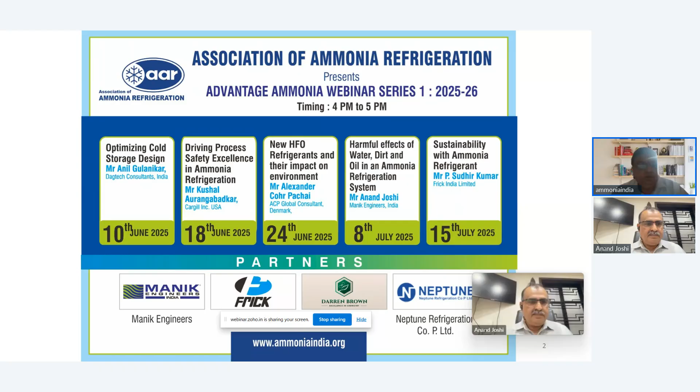A little introduction about Mr. Anand. Many of you know him already. Mr. Anand is director at Manik Engineers India. He's an engineer from Bharati Vidyapeeth College of Engineering in Industrial Electronics and Instrumentation. He's synonymous with Manik, a well-known brand for refrigeration controls, and he's a pioneer in many cost-effective refrigeration plant control solutions. He has vast experience of 35 years, having generated different products and solutions for energy optimization and conservation. He is also past president of Association of Ammonia Refrigeration, past president ASHRAE Pune chapter. He is also a member of ASHRAE, Indo-German Chamber of Commerce, Indian Institute of Electronic and Telecommunication Engineers, Indian Dairy Association, and RETA.

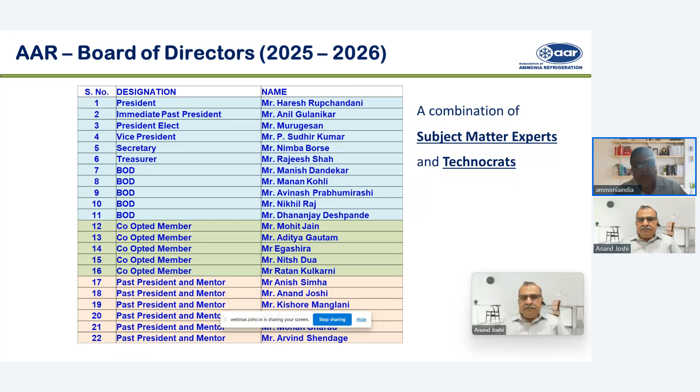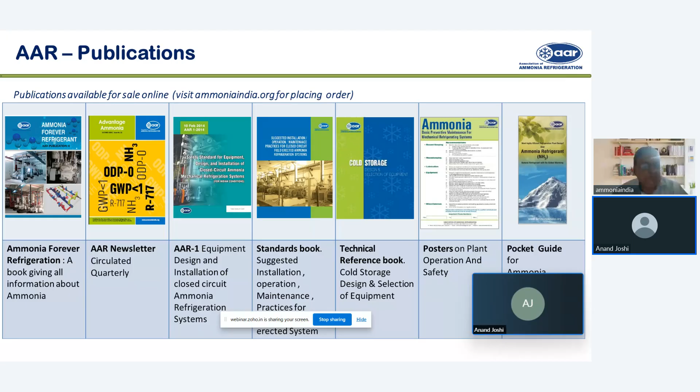These are the publications we have. Apart from the newsletter, which we publish every quarter, we publish some books and guides for the benefit of the industry. This is a standard on which we had put a lot of work, and we came out with a safety standard for equipment design installation of closed circuit ammonia mechanical refrigeration system. Based on this, BIS has adopted it, and an IS standard is now available.

Advantage Ammonia programs are in-person programs we have been doing, and they have been very popular over the last 10-12 years. This year we have so far successfully conducted 2 programs, one in Pune and the other one at Sangli. We have planned to conduct more such programs at Coimbatore, Nashik, Mangalore, and Deesa in the coming days.

Then webinars, which are free, just to spread knowledge of ammonia refrigeration. We started in June this year, and it has been continuing. After series 1, we will plan for series 2, and the webinars will be an ongoing thing.

Apart from webinars, we are also thinking of providing online training to interested companies or individuals. So if any one of you want to have some kind of training which can be conducted online, you can approach AAR - we'll be glad to assist you on that.

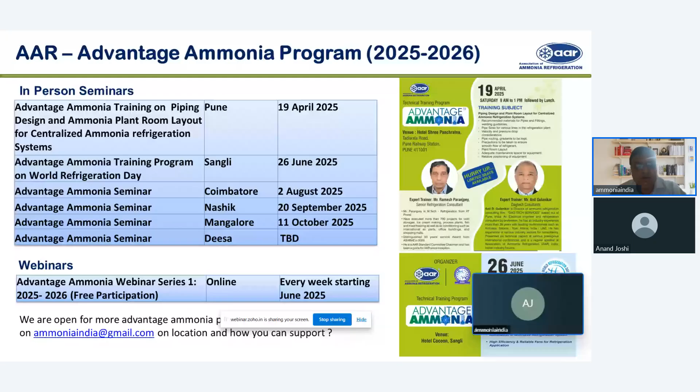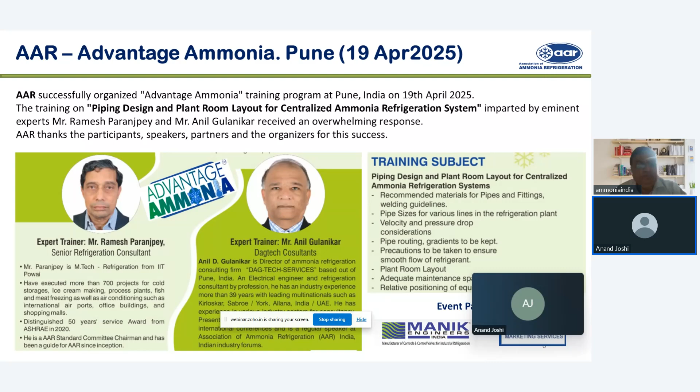At the Pune program we had expert speakers, Mr. Paranjpey and Mr. Anil Gulanikar, regarding piping design and plant room layout. These are some of the glimpses of the program.

On 26 June, which was World Refrigeration Day, we conducted a program at Sangli because we wanted to be at the ground level rather than having a big fancy program with no technical stuff. We wanted to be in the midst of the actual end users.

We had very interesting topics regarding cold storage, where ammonia is really beneficial compared to freon refrigerant. This was organized by Ammonia Refrigeration, supported by us, and we are thankful to the partner for the programs. These were some pictures from that program, covering different topics we had.

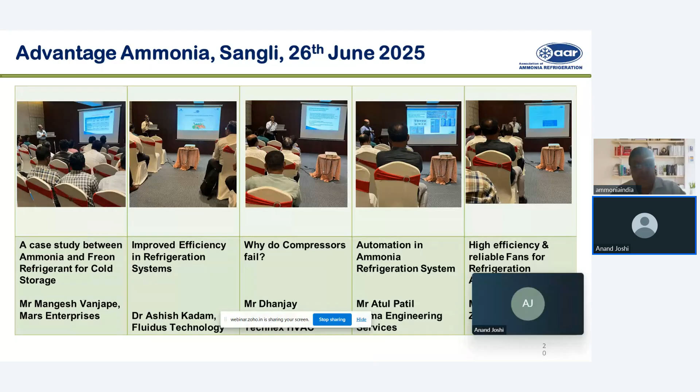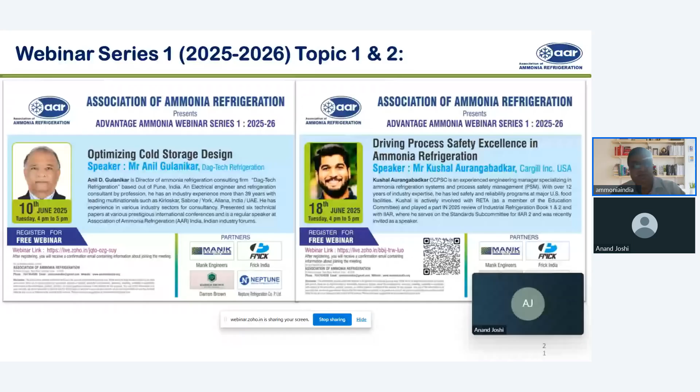Coming to webinars, we already had three topics. Webinar one on optimizing cold storage design, second one on driving process safety excellence in ammonia refrigeration, and third one on new HFO refrigerants and their impact on environment.

Arcon, our flagship event, will be held in January at Hyderabad. We are in the process of finalizing the venue and will share that with you soon.

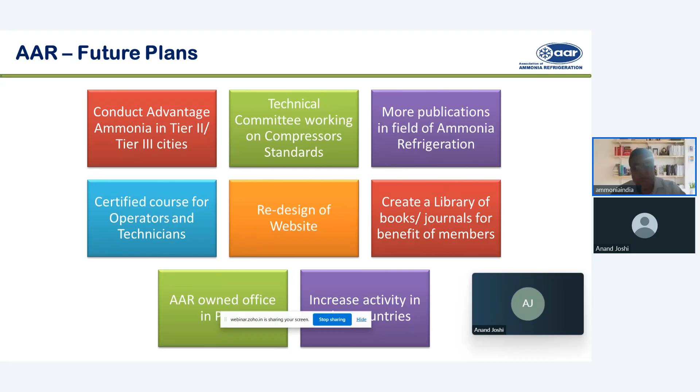For future plans, we want to conduct more Advantage Ammonia programs in various cities. The technical committee is working on other standards as well, and we are working on some publications. Something we want to seriously pursue is a certified course for operators and technicians. We also plan to redesign the website, create a library, and have our own office.

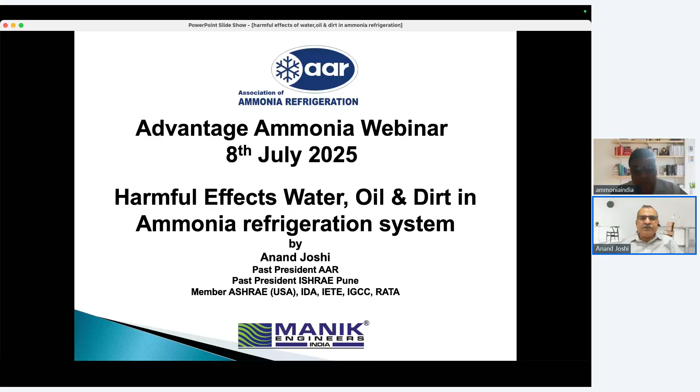Today's presentation is all about the harmful effects of water, oil, and dirt in ammonia refrigeration systems. I'm trying to explain my experiences with these issues and their harmful effects on the system. I'm thankful to the Association of Ammonia Refrigeration for giving me this opportunity to present, and I hope you'll be able to get some benefit out of it.

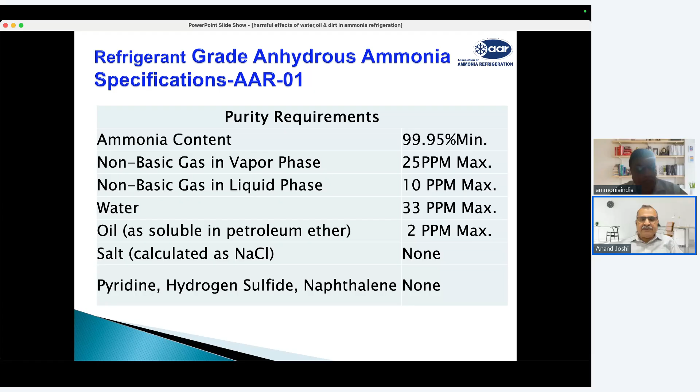As we know, the ammonia purity required for refrigeration plants is 99.95%, called anhydrous ammonia. However, we normally don't get that kind of pure ammonia, or our suppliers don't supply such pure ammonia, and there are ways in which impurities or contaminations enter into our system. Let us try to find out more about it.

When we talk about our ammonia temperature-pressure chart, which we all refer to for plant operation, system design, and operations, this chart is valid only for pure ammonia, that is anhydrous ammonia. If our ammonia is not anhydrous and contains water or other things, this chart does not hold good.

So to get these results, like we want to get minus 40 degrees centigrade at the pressure of say minus 0.28 bar gauge pressure, we must have pure ammonia. If water is there or other things are there, then you will not get minus 40 at minus 0.28 bar pressure. So let's try to see what is the contamination.

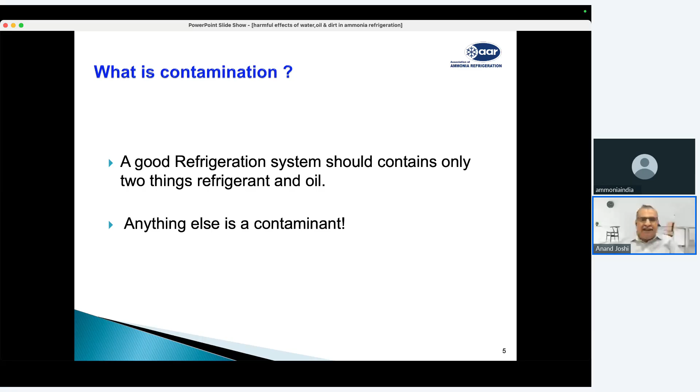Technically, a good ammonia refrigeration system should have refrigerant and oil, and the oil should only be in the compressor or the parts of the oil separator or oil cooler. It should not go into the system. Anything else in our system is a contamination. What are the normal items we observe as a contamination? One is the water, oil, dirt, rust, sludges, and of course the non-condensable gases. Today we are not going to talk about non-condensable gases, but we'll talk about water, oil, and dirt.

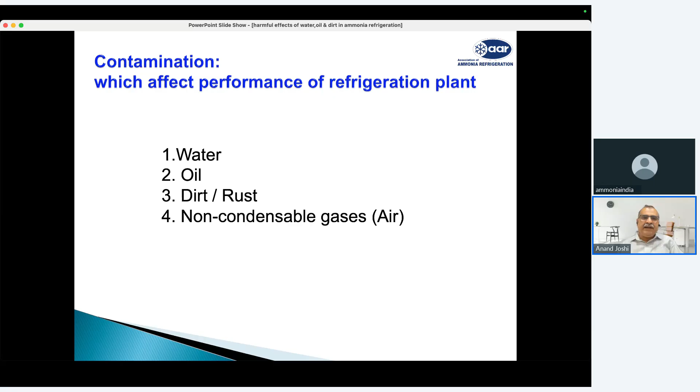As the temperature of the solution or ammonia is reduced, the ability to absorb water increases. Typically, at 30 degrees centigrade, it can absorb around 30% of water. At 0 degrees centigrade, it can absorb about 46% of water. And at minus 33, it can absorb around 100% of water. So typically, for a freezing plant or a low temperature plant, the possibility of water and ammonia mixing is 100%.

Now, when ammonia and water mix together, it actually forms ammonium hydroxide. So ammonium and hydroxide ions can cause corrosion in our system. And when this water mixes with compressor oil, it also has a chemical reaction that creates nitro compounds, which we also call sludges. And these sludges definitely clog strainers, filters, and the compressors.

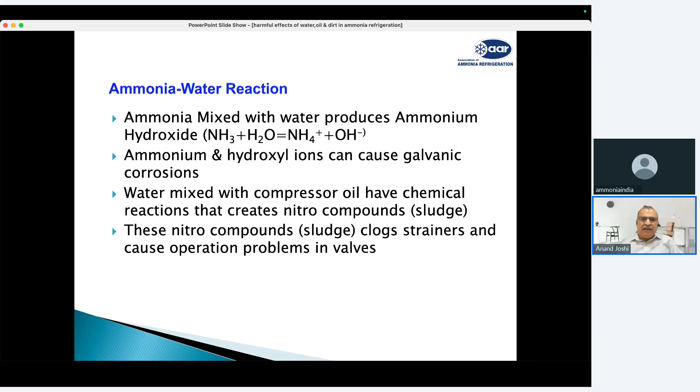Now, what is the effect of water mixing into the ammonia? When there is pure ammonia, you can get a minus 40-degree temperature at minus 0.3 kg per centimeter square ammonia pressure, or at 0 kg you can get minus 33 degrees ammonia temperature. But when you have 20% of water in ammonia, remember below minus 30, 100% water can get absorbed into the ammonia. So at 20% dilution, instead of getting minus 40, you will get only minus 36 degrees centigrade. Or instead of minus 33, you will get only minus 29 degrees centigrade.

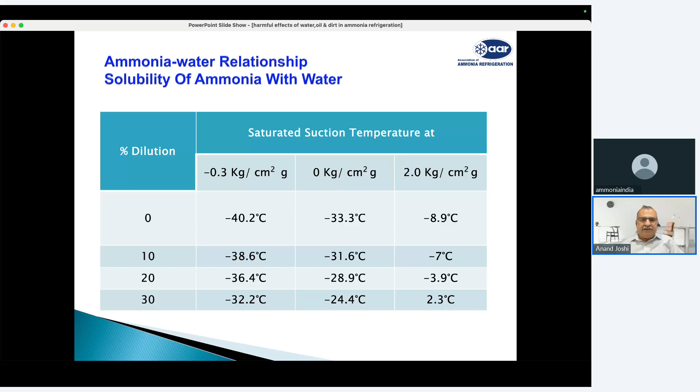So what it means is that I will not get my desired refrigeration capacity at my rated condition. To get that rated refrigeration capacity, I need more compressor capacity, or I need to operate the compressor at lower suction pressure to get the same refrigeration effect. So these things totally affect our system.

Now, how does this water come into our refrigeration system? Water can come in during the initial construction and testing setup, and while continuously running the plant. When the plant is being constructed or the equipment is being manufactured, water can remain in vessels when people are doing hydro testing. Technically, as per the standard, you should not be doing hydro testing. You should be doing testing with dry nitrogen. But still, many people use hydro testing for pressure vessels and other equipment. So if it is not properly drained, you will find a lot of water remaining in the system because it's difficult to dry out these vessels.

And during construction at site, ammonia, as we know, is basically a site-fabricated refrigeration plant. Many times our pressure vessel connections or pipes are kept open, and the condensation which happens on these pipes during installation goes inside the pipe. If pipes are not properly cleaned, this condensation remains in the pipe, and then it goes with the ammonia.

Also, many times people use air for pressure testing. Particularly, they use the ammonia compressor to get the air, and then that air is used for pressure testing. So this air, which is normal atmospheric air, also contains moisture. And this moisture which enters with the air may remain in the pipes and vessels, and then cannot be properly evacuated.

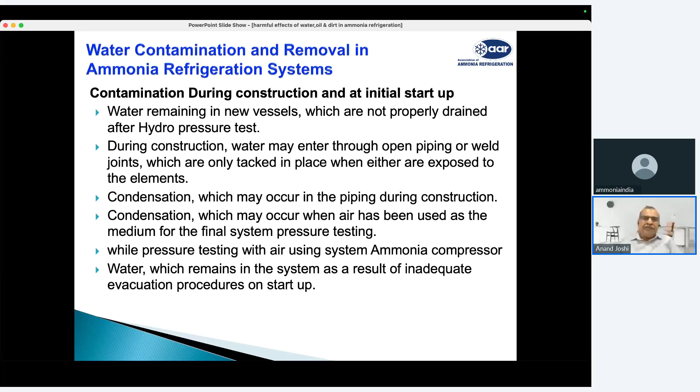And when this plant is running now, we already have a water content in our plant. When the plant is running or being charged with ammonia, many times we do not have the certification for the purity of the ammonia we receive. We receive ammonia with water itself. Instead of being 99.95% pure, it may be 95% pure ammonia, so the 5% balance may be water, and that we don't know.

Also, many times we top up the ammonia with ammonia cylinders. The water is there in the cylinder, and to get the full ammonia out of the cylinder, we rotate the cylinder by 180 degrees and put all the water inside the ammonia. Then there are heat exchangers like shell and tube heat exchangers, used as chillers, condensers or oil coolers, where there is a possibility of leakage and water entering the ammonia system from the coolant side. And when you are draining or charging the oil, it is also possible that air will enter the system, and it may contain water.

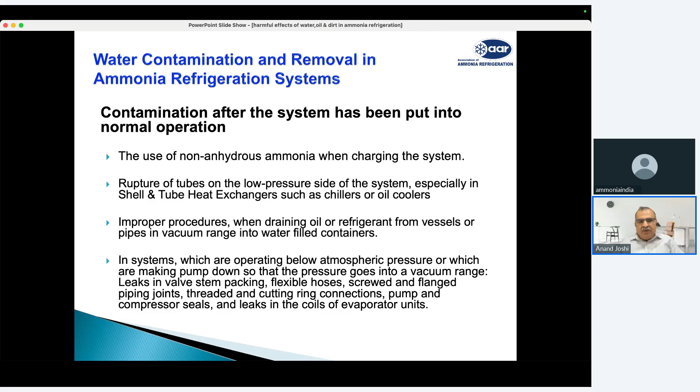And when you are operating the plant below atmospheric pressure, that is below minus 33 degrees centigrade, the inside pressure is vacuum. So if there are any leaks in the valve stems, flexible hoses, or any other joints, instead of ammonia coming out, air enters the system, and along with the air we have water inside. Also, when proper evacuation is not done when service is being done or filters are opened for cleaning, air enters the system, and along with it moisture enters the system.

And sometimes reactions between ammonia, oxygen, water, and sludge create more water in the system. Another important factor is when we do not have purging systems or our purgers are not working. When the purger is not working, the air that enters the system remains there, and the moisture in the air becomes water and mixes with the ammonia. This example shows that even if the purger is working and purging air, water will definitely come into the system, and at the end of the year we'll typically have 50 liters of water if the purger is purging 5 liters of air per minute.

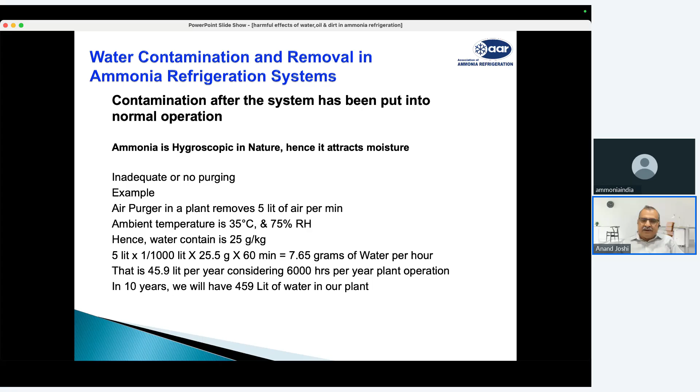So when this water comes into the system, it mixes with ammonia and causes a lot of effects. As I told you, the first effect is increasing the temperature of ammonia at rated pressure. You don't get the rated temperature at the rated pressure. Then there is corrosion: when water and air come together, there is oxidation inside, causing corrosion in the pipes and vessels, and rust gets formed. It also affects the oil in the refrigeration system; the oil starts forming organic acids, and then sludge gets formed.

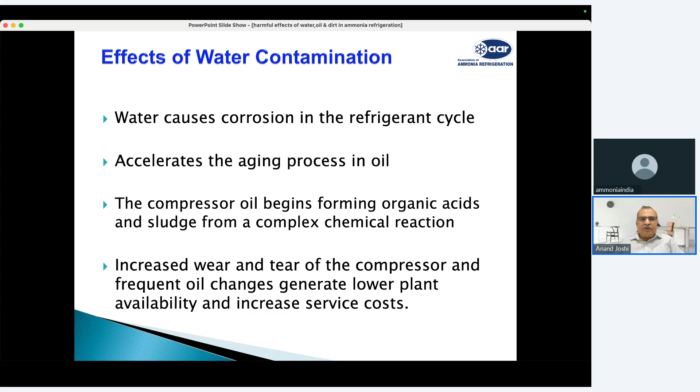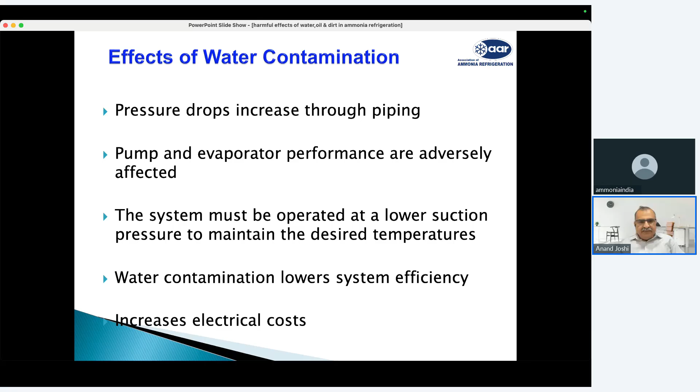And due to the water content in the compressors and the deterioration in oil quality, compressor wear and tear and spare part damage increase. We need to change oil frequently, so more oil is required and more regular servicing is required. As sludge and rust form in the refrigeration lines, there are pressure drops, valves and controls get affected, and pump and evaporator performance also gets affected when the sludge accumulates there. Water contamination lowers the system efficiency, so we need more refrigeration capacity, which means more electrical input and more power.

Now, water will normally accumulate on the low pressure side. There is often a misconception among people, but most of the time you will find water accumulating on the evaporator side, in the pump receivers, in the valves and controls, or in suction accumulators for DX systems. In a two-stage system, it will accumulate more on the low temperature side than the high temperature side. Why? Because there is a pressure difference between ammonia and water. At 2 degrees centigrade, ammonia pressure is 3.6 kg per centimeter square, whereas water pressure is only 0.007 kg per centimeter square.

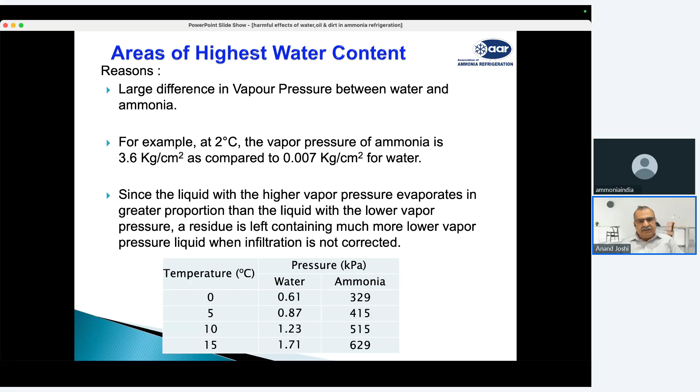So when ammonia evaporates, the ammonia goes out, but the water remains in the system, and it remains at the lower side of the vessel. So at the bottom, mostly you will always find this water. The biggest effect of water in a refrigeration system is that it affects the bearing life of the compressor. As you can see in this graph, depending on the percentage of water which gets mixed into the oil, the bearing life reduces.

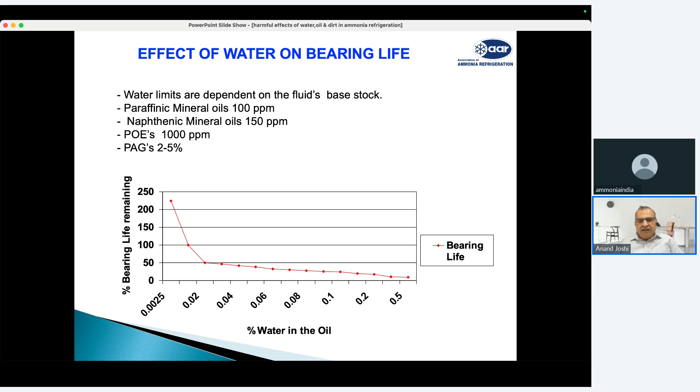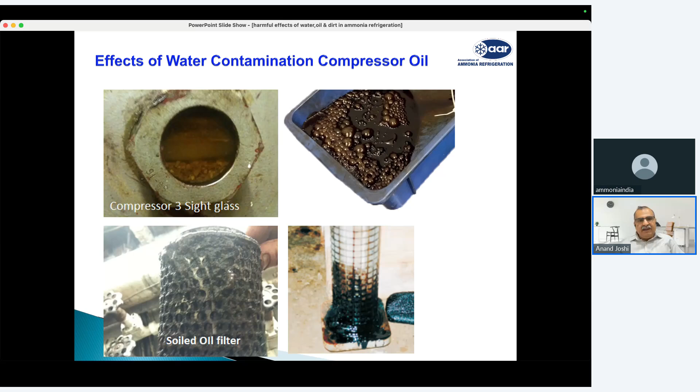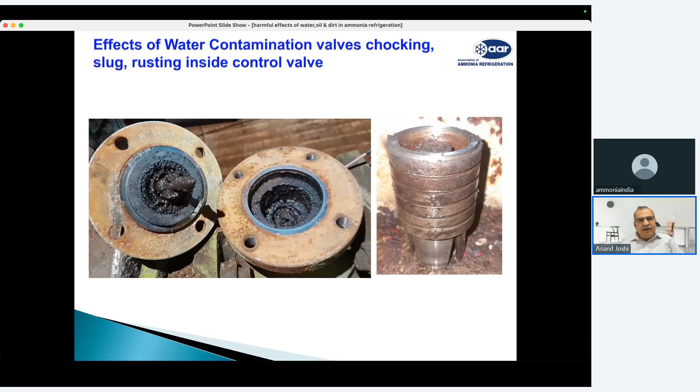This is how the valves and controls get affected. You can see because of the water in ammonia, there is so much rusting happening inside the valves that valves cannot operate, valves choke, and you need to really open all the valves and controls and replace them. These are some more photos showing how the sludge and the water along with the oil damages the controls. You can see here the water content found in the valves, and then it generates the rust and the dust in the system.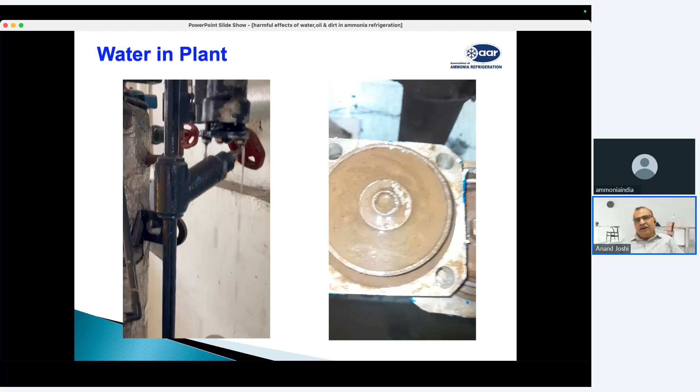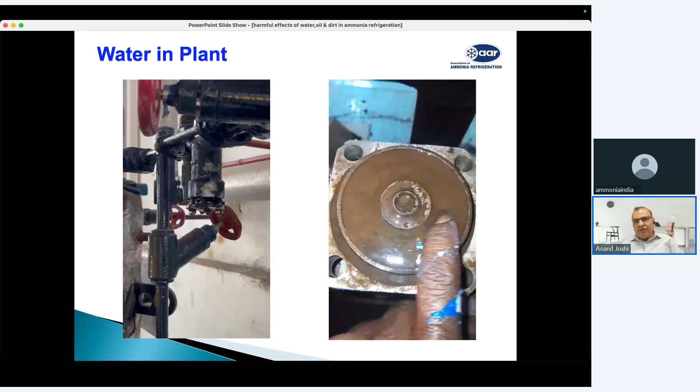There are so many photographs which will show you how these various types of valves get damaged or get blocked because of this, how the filters get choked, and this sludge keeps on forming inside. This damages your valves. Valve seats get damaged. You get corrosion inside. I would like to show how much water comes out of the refrigeration line. Just see, opening up the filter cap, the water is coming out of it. In the video, you can very easily see the water accumulated in the valve itself. Because the valves are installed on the low temperature side, you will find water getting in.

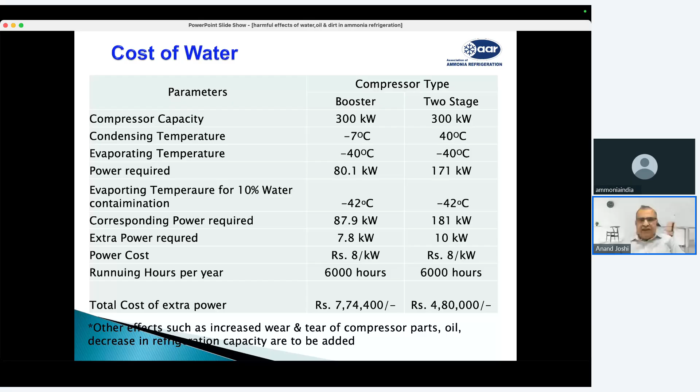So typically, when we talk about the main effect of water, it is lowering temperature. So if you want to get a certain temperature, instead of that, because of 10% water contamination, you have to run it at -42, and you are spending a huge amount of electricity cost. We are talking of around 700,000 rupees, or close to $10,000, in a year of electricity. That's India. Elsewhere electricity costs will vary, and that will also be your revenue loss.

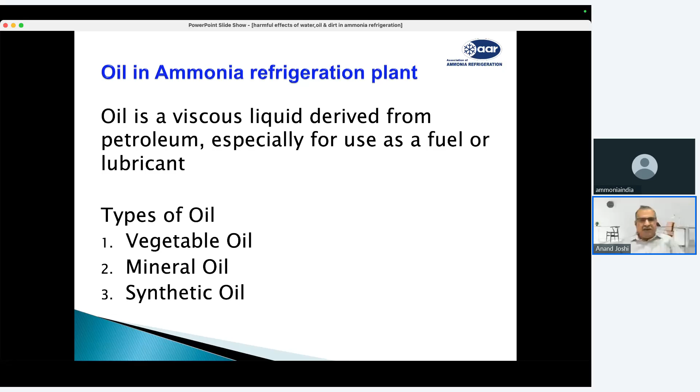The second part of this presentation is oil. Oil is a viscous liquid and it is used for the lubrication of the systems. Types of oils typically are vegetable oil, mineral oil, and synthetic oil. In refrigeration, we use only mineral and synthetic oil. Oil is used in the refrigeration plant, particularly on the compressor, for reducing friction, cooling the compressor, sealing the clearances with the piston or between the screws, reducing noise levels, dampening, cleaning, washing out debris and gum particles, and reducing corrosion.

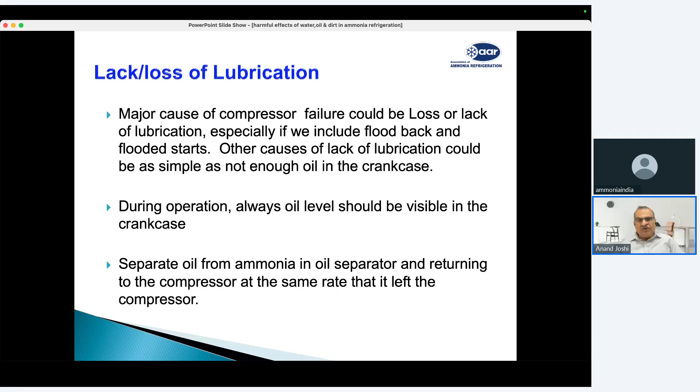Lack of lubrication, lack of oil in an ammonia system, is one of the major causes of compressor failure. If there is a liquid floodback and a lack of lubrication, the compressor is almost guaranteed to fail. Lack of lubrication means there is no sufficient oil. It means the oil is getting carried over into the system. Our oil separators are not working properly and oil is getting thrown out, or there is more wear, like the pistons or piston rings in compressors. And if the oil is not there, the compressor is going to get damaged, and it is definitely going to reduce its life.

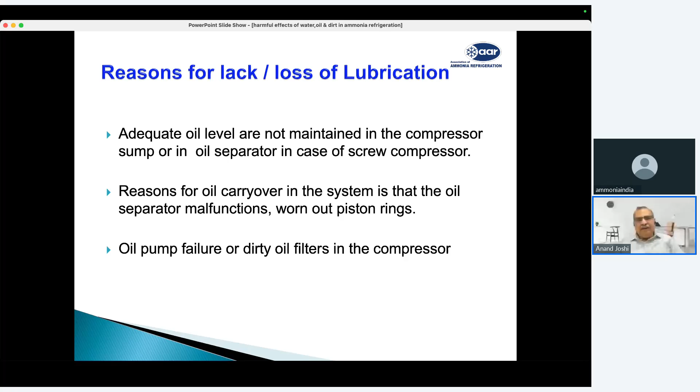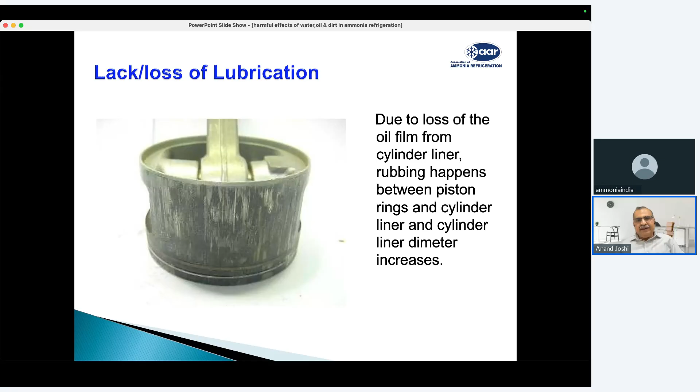And there is another effect on oil: sometimes our condensers are not working properly, or we have air in the condenser, and that raises temperatures, which increases the oil temperature.

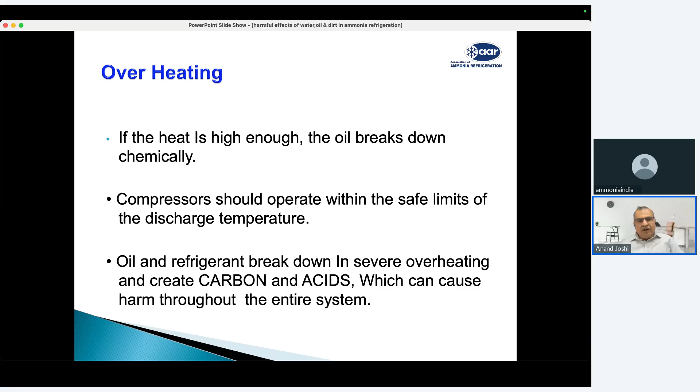So high, in that case oil can break also, and chemically it can break. And if oil breaks, normally oil will generate components which will be non-condensing gases, and those will be affecting the refrigeration capacity. And the compressor will not be operating in safe limits as the temperature goes high, and then there will be a lot of creation of carbons and acids through oil breakage, and it will damage the compressors. This is how a screw compressor gets damaged because of overheating.

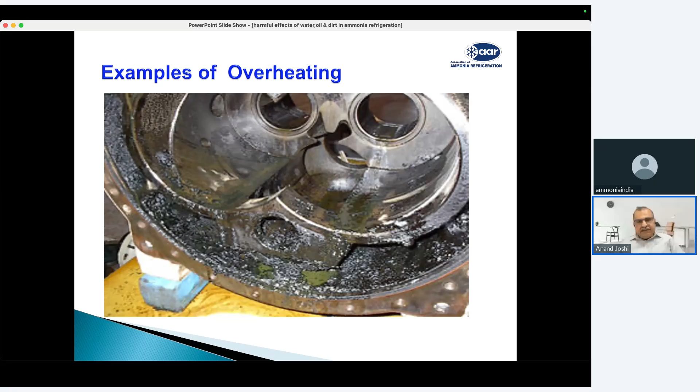Now, what happens is that if there is oil carryover happening, then the oil will go into the heat exchangers like condensers or evaporators, and the capacity of that equipment will be lost because oil gets accumulated there. And always remember, oil is heavier than ammonia, so it will always settle at the lower side of the vessels or heat exchangers, and that will also affect your instrument level controllers or your level indication systems, which may generate malfunctions or give incorrect signals.

And then it also leads to continuous oil monitoring and oil top up. When we say oil top up, theoretically whatever oil we put in the system, it must come out from somewhere. But if we are not able to get all the oil back and we are just adding oil, just topping up the oil, it means we are increasing the oil cost, and at the same time oil is getting accumulated somewhere, at some points on the evaporator sides, on the low pressure sides, and that is affecting the performance. And when this oil carryover becomes more, then we also have to drain the oil frequently.

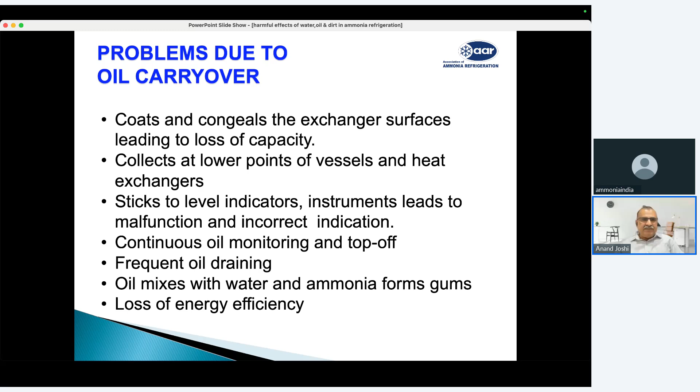In my experience, sometimes, in particular in gravity-fed systems, your evaporators get full of oil and you are not able to get the refrigeration capacity. And secondly, when this oil travels with ammonia, as we know, oil is not miscible with ammonia. It travels with ammonia, and it may mix with the water in ammonia, and then it forms gums, and it definitely gets choked in the system's filters, and it damages the system.

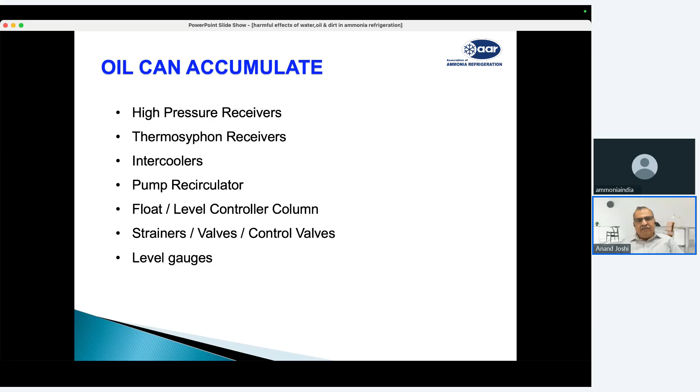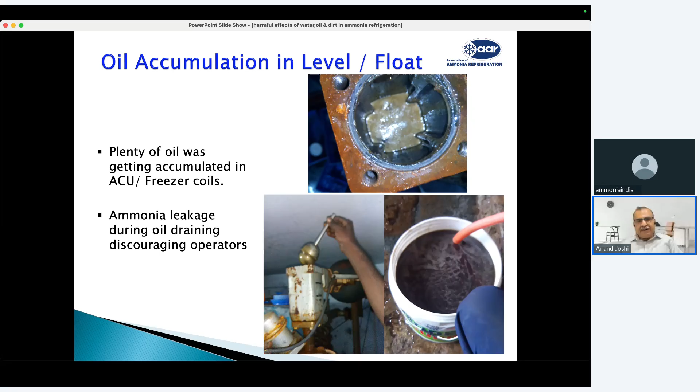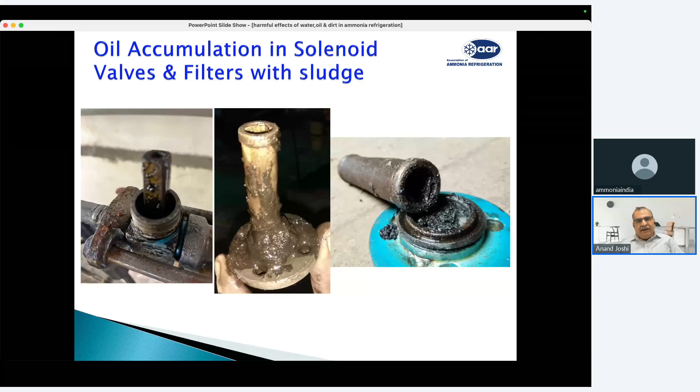This oil, along with the dirt and things, gets accumulated in your control filters, and it damages them. Their performance gets affected, and when it gets choked in the solenoid valves, it definitely leads to burning of the solenoid coils. Another major effect of this lubrication failure is on the bearing life of the compressor. As I told you, when water is there, the bearing life reduces. Similarly, with failure or poor quality of the lubricating oil, bearings start getting damaged frequently, and we need to replace the bearings before their required operating hours.

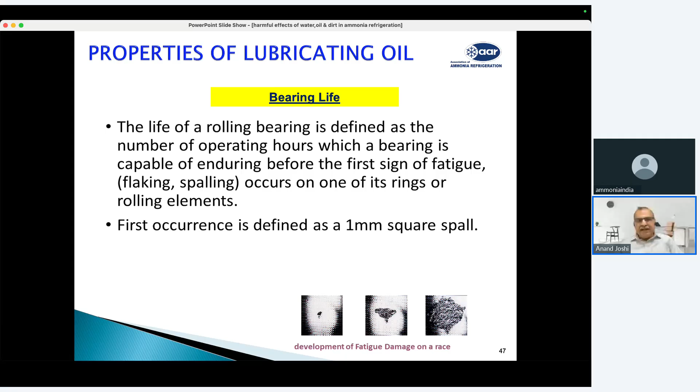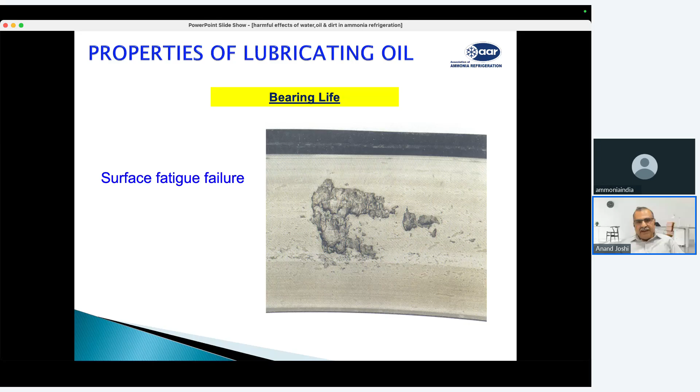So these are some of the photos showing the failures in the bearings, like surface fatigue on the bearing side, or progressive surface fatigue. You can see here how it has been damaged.

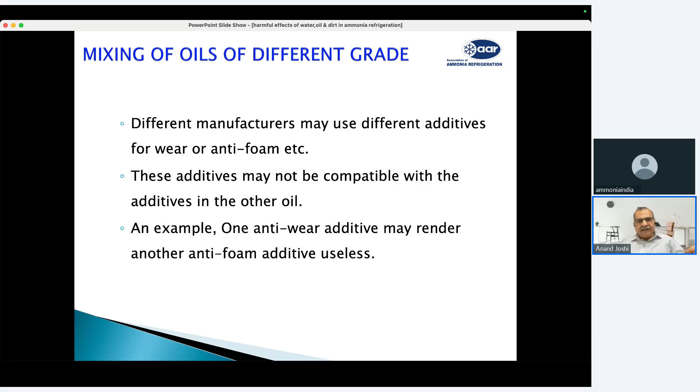And there is also a possibility that many times people mix different grades of oils, or sometimes people sell us magical additives, which they claim will improve the life of the oil or the performance of the system, which does not happen like that. And if these are not compatible with the oils you are using, then they are wearing or damaging your compressors. You can very easily see the bearing damage because of the oil additives.

Oil should not be mixed. Different types of oil should not be mixed. It creates a major problem and results in ammonia issues. Many times people sell those magical additives which claim to improve the efficiency of the oil and system; it does not happen that way.

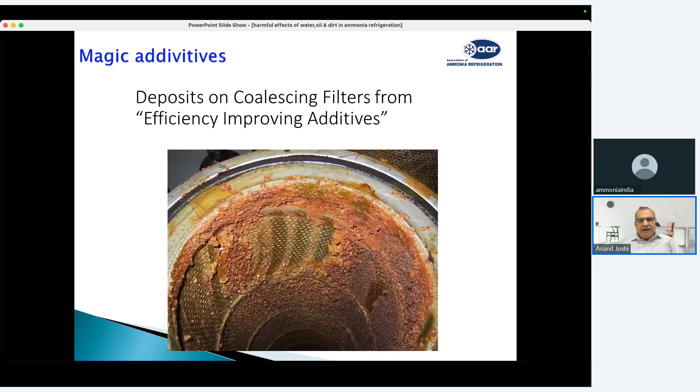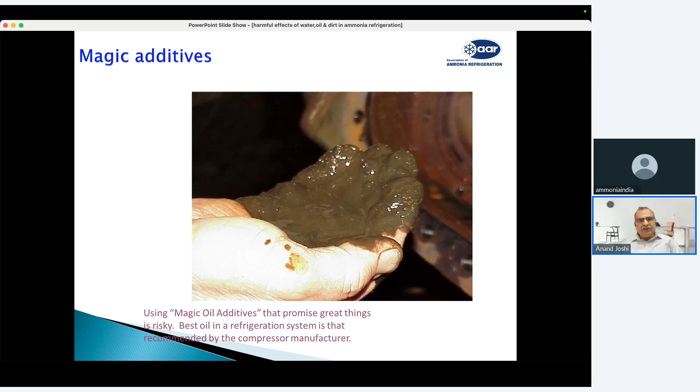You can see how the coalescing filters are getting choked, and you need to replace them. This is another additive being added, and you can see how it becomes a thick film and gets choked. You can see here in the video how that oil gets sludged, and now it is being drained from the refrigeration plant.

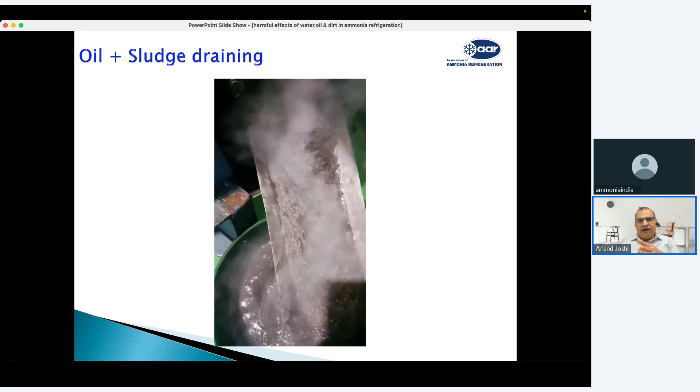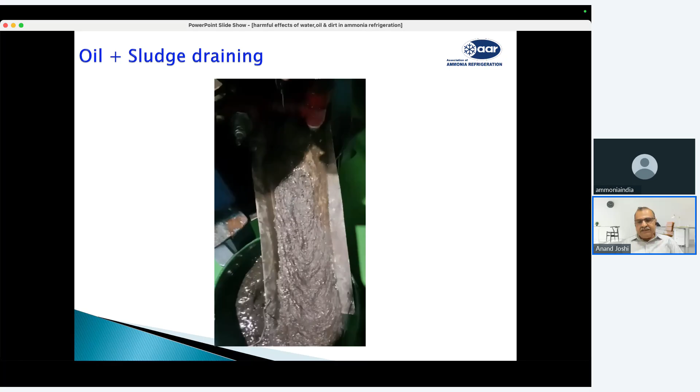So this video clearly shows what happens when you mix different oils, oil additives, and water into the ammonia. We should avoid these things, and this is a very simple indication of what is coming out here. It's from an ammonia refrigeration plant.

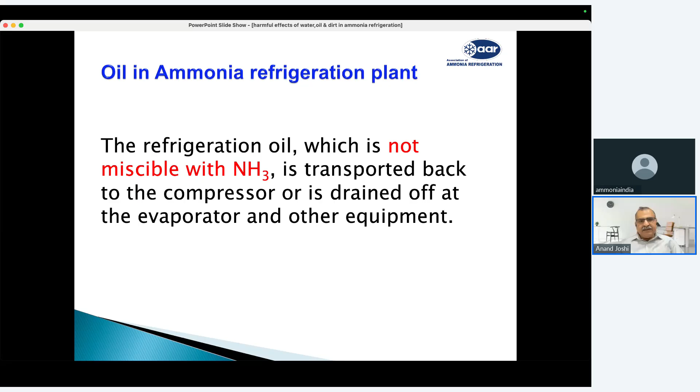So oil is not miscible in ammonia. It should be transported back to the compressor through the oil separator, or should be drained immediately. If that is not done, then you always have a problem. The arrows shown here show various drain points which are provided in the refrigeration system.

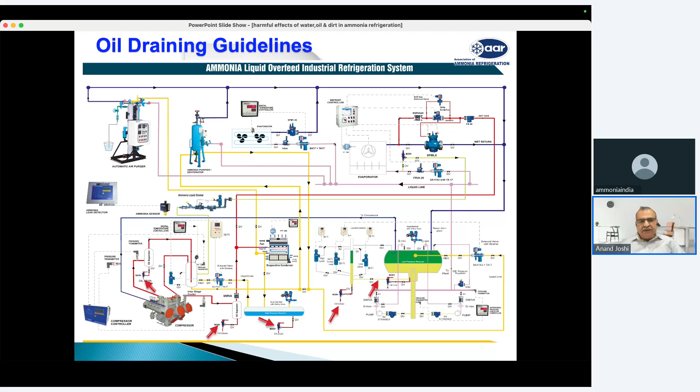You can have an oil drain in the oil separator, on the intermediate vessel, on the high pressure receiver, on the low pressure receiver side, and if it is a gravity fed system, it can be on the evaporator side. When you are draining the oil, you should take proper precautions, because ammonia may come out along with the oil.

So the drain points must be provided at the bottom, and they should have a differential pressure. You should always use spring-loaded dead man's valves, so that in case of any ammonia leak, it can be very easily closed. And the pressure in the system should be higher than atmospheric pressure, so that you can take the oil out.

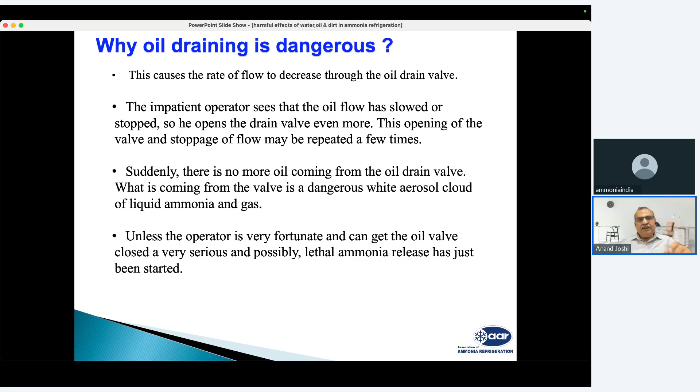When the oil stops coming out, you should immediately let the valve close, and also close the valve behind your dead man's valve. These are the typical oil separators, oil rectifier systems, provided particularly with the pumped liquid overfeed system.

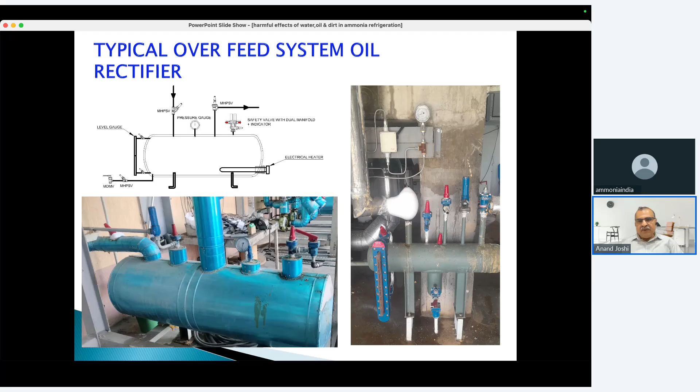We should provide such systems properly designed with a safety valve, so as to protect against any ammonia leakages. This photo shows some of the oil drain points here. Such dead man's valves should be provided for draining oil. You can see each dead man's valve is provided with a stop valve.

Normally the stop valve is closed, and when you want to drain, you open the stop valve, then you operate the dead man's valve. When you close the dead man's valve, then close the stop valve and open the dead man's valve once again, so that anything accumulated between the valve and the dead man's valve can be drained out.

Next is rust, dust, and sludges formed in the refrigeration system. Theoretically, refrigeration systems should not have any foreign matter like dust, grit, rust, impure oil, wax, sludges, etc. However, these always get into the system. They damage your solenoid valves and control valves, and they choke your filters.

When there is air and water in the system, rust formation starts inside pressure vessels and pipes, because most of our equipment is made of steel. During installation or maintenance, welding spatter also enters the system, and it mostly chokes the filters of the solenoid valves.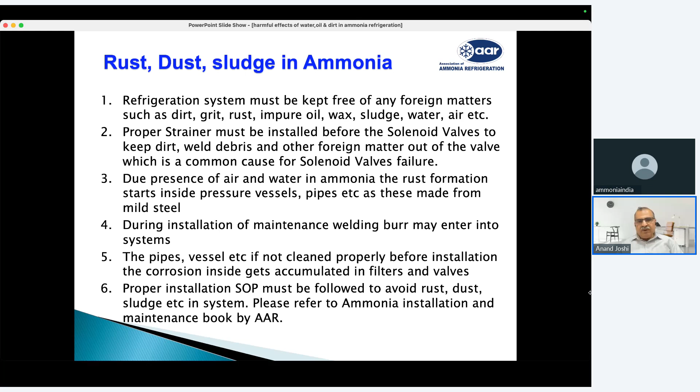Systems and SOPs have to be there in your plant to avoid any rust or dust formation in the system. Please refer to the ammonia installation and maintenance guidebook by the Association of Ammonia Refrigeration.

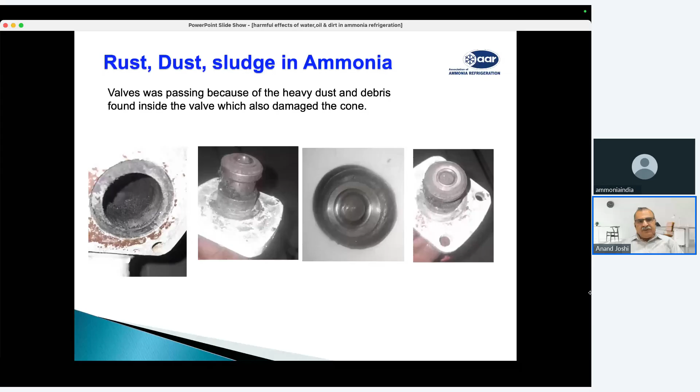What happens is when rust and dust come into the ammonia, it starts choking your valves. Valves get corroded, valve seats get damaged and covered with rust, and the welding and the valve does not pass or does not hold. That's a typical complaint we find, and it's because of this rust and dust.

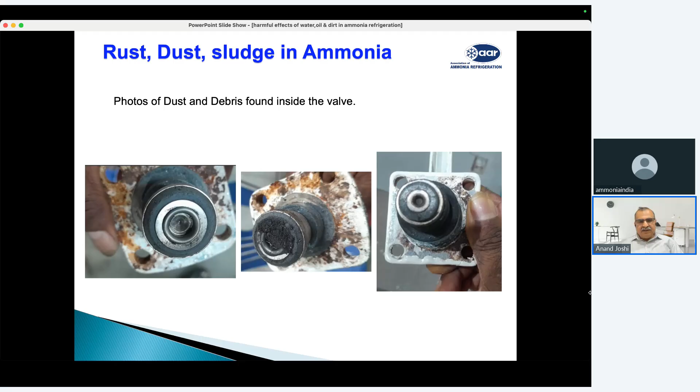These are some photographs from an actual site. You can see how much rust and dust is there. It means that when this plant was erected, it was not properly cleaned, and there is water in the ammonia system that is not being removed continuously. This simply starts damaging your valves, your control valves, and this rust and dust always affects your total system performance.

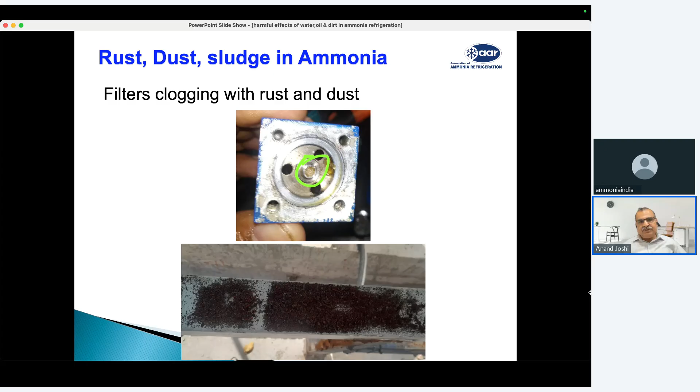There are always foreign particles you find coming inside the filter, and filters then get choked. Rusting happens because of the water; there will be rusting inside the valves and controls. Remember, all our valve controls are normally steel valves, so when ammonia comes into contact with water, rusting formation is always there. The option is to go for stainless steel valves.

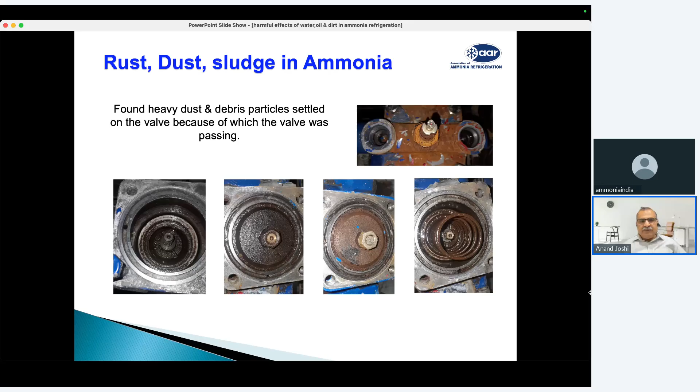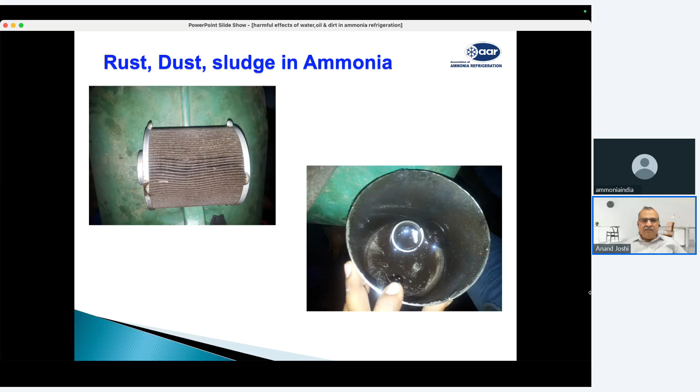The same thing happens with your screw compressor. The rust gets accumulated on your screws and damages your compressor body and rotors. Compressor filters also get choked, and you can see here this filter is completely choked. Now you have to replace the filter, and when the filter is choked, there will be a drop in suction pressure. So your compressor will be operating at much lower capacity or will not get proper suction, affecting the performance of the system.

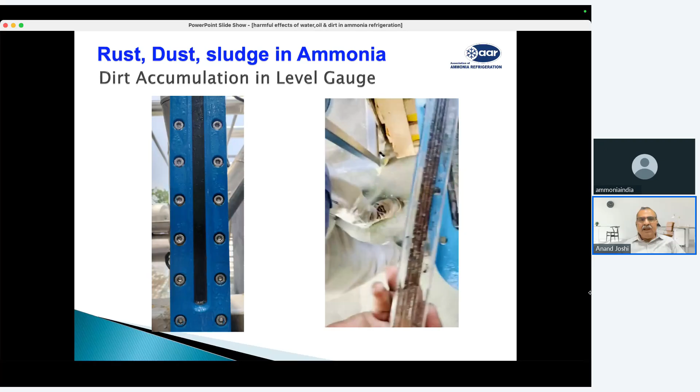The main thing that happens with this water and sludge is it damages your safety valves. Your safety valve seats get damaged, so either the safety valve leaks or it does not open when there is pressure higher than its rating. Unless you are calibrating your safety valves, you don't know what is happening inside, since a safety valve is not a daily operating device. When it is required to operate, your safety valve will not function. You need to repair and calibrate your safety valves every year.

In refrigerant systems, only refrigerant should be circulating in the system and nothing else. All other materials are what we call impurities or third-party elements which are not required for refrigeration. Secondly, ammonia has a very high affinity to water, so when it comes into contact, it absorbs water, and since ammonia temperature is low, it has more absorption capacity for water.

Third, oil is not miscible in ammonia refrigeration, so it gets carried over along with the ammonia and accumulates in every part of the refrigeration system. Being heavier than ammonia, oil settles at the bottom of evaporators, receivers, or intermediate vessels and LP vessels, where it accumulates and starts affecting refrigeration performance.

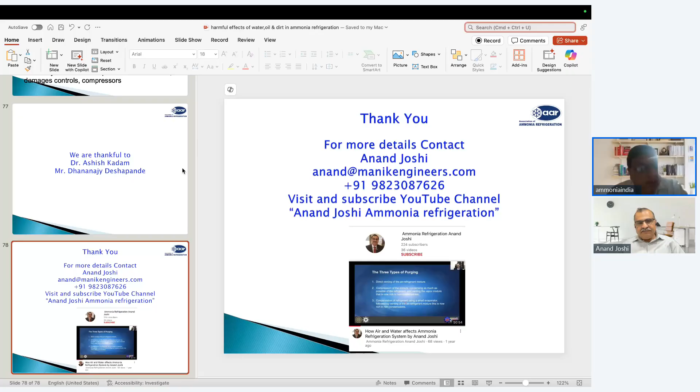How to identify water in our system? Well, a very basic thing you can do is check your suction pressure and the actual temperature you have received. That is one way of identifying it - if your suction temperature and the rated temperature you are able to achieve match, it means the water contamination is less. Secondly, ammonia sampler kits are available - you can connect it into your low pressure side, take an ammonia sample into it, and it can help you find out the exact water content in the system.

Other question: how to maintain the oil temperature after proceeding for drain. Oil temperature when you are draining will come to your ambient temperature. So when you are draining the oil, particularly from the low pressure side, it will be at low temperature. When you drain it out, you check the quality of the oil, whether you want to filter and reuse it, or just throw it away, or accumulate it into a drum and dispose of it. You need to put it at ambient temperature for a certain time so it comes to ambient temperature, and at the same time, if there is any refrigerant content in it, it will evaporate.